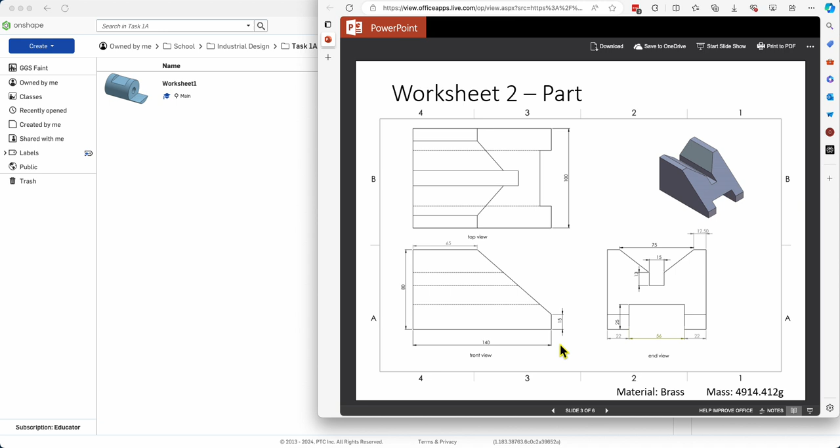So I'm going to come back over here. We're going to create our new document, and this is going to be my worksheet 2, still in that same folder. If we have a look at my dimensions, there'll be a couple of key things we'll need to think about when we develop this, but let's get our 140 rectangle by 80 is where we are at.

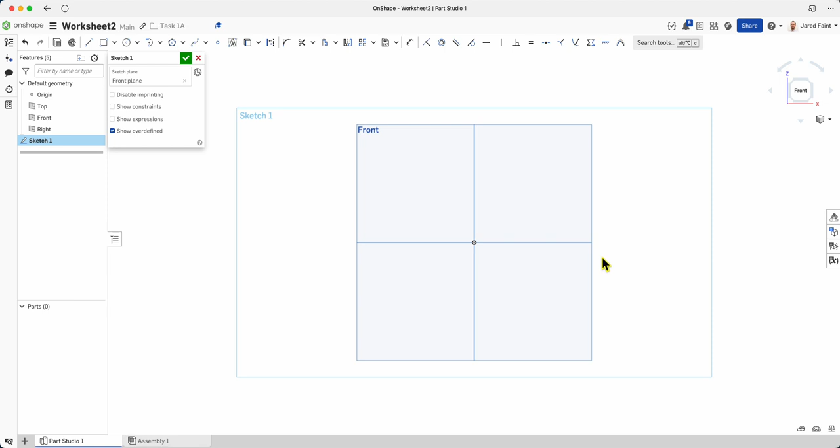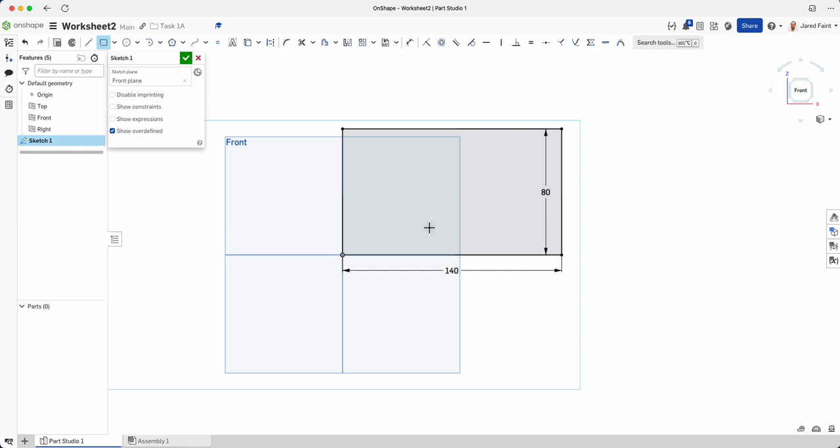This is on our front, so I'm going to create my sketch on the front view. I'm going to type N to take me normal to that flat view. I'm going to go from my origin, click that out - we have 140 by 80. 140, enter, 80, enter. If you forget to type those in, you can always come back up to dimension and lock those in. But now I've got that set up, you can notice that it's black.

Now if I come back down, I've got a line to go in 65 and 15 down. So I'm going to just add in a line for the moment, making sure it doesn't lock into the middle - see how that's trying to go midpoint, because it's not that. Now I can move that anywhere on the line, but this is where I'm going to add my dimensions.

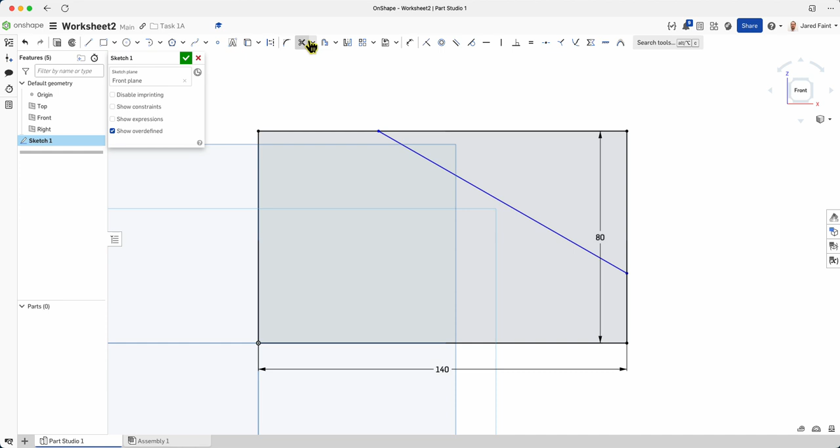So if we have a look back over, 65 and 15 is what I need. So I need my dimensions - those two are 65, and then that one from those two points was 15. Now if you want to, you could go and trim that out, but it doesn't matter because what we're going to do next is just extrude from there.

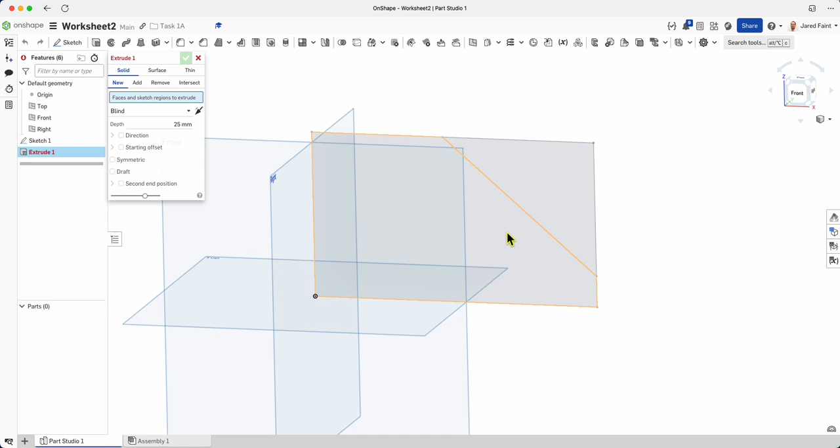So select the face that you want. How deep do we need it to go? If we have a look, it's 100 all the way back, so that's the dimension we need - 100 there, and tick, happy days. So there's the front face of ours there.

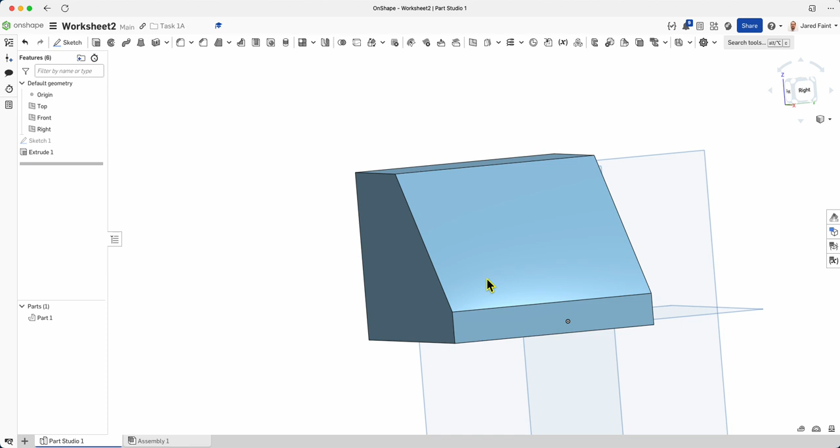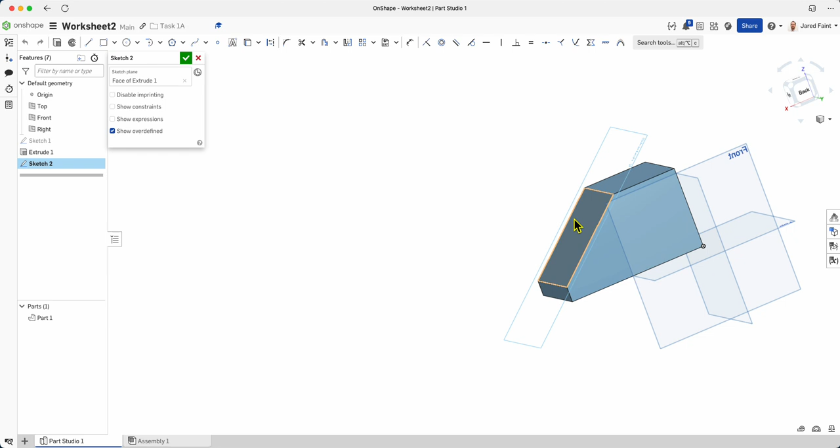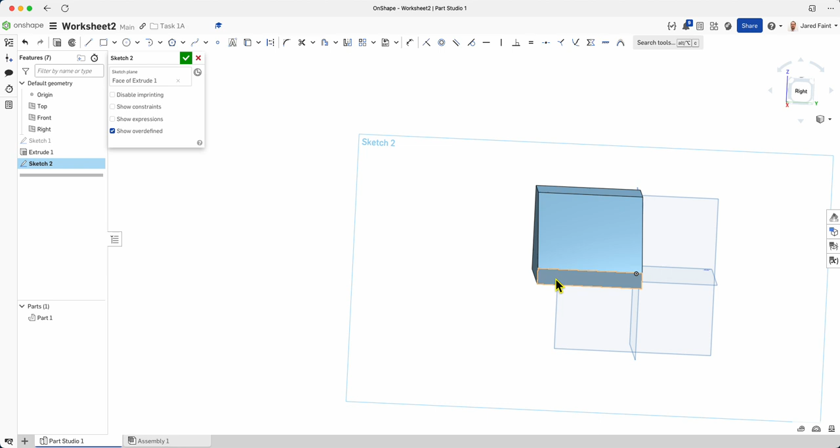Now we're going to come over to the right view and add those details. One of the errors we sometimes see here is you start trying to do a sketch on that plane - now if I do a sketch on that one, you notice it's on an angle. All my dimensions that have been taken from here are actually on the flat plane here, so I'm going to go through and remove that. Now I could do this either on this plane here, or on the right plane over here as well - so either one will work, but I've got it going on here so we can see that's where it's sitting. So I'm going to go back to normal view there, and I have got some dimensions to add in.

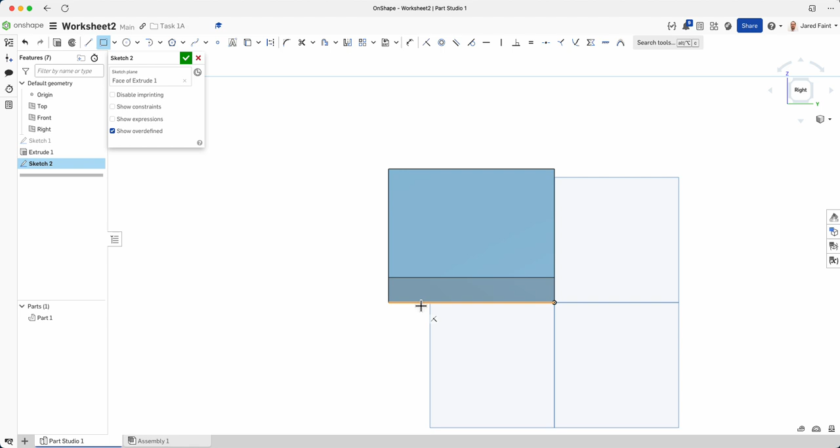So we can see we've got a little rectangle to add at the bottom, which is 25 by 56. Let's drop that on first - 25 by 56. There it is there, and I might lock that in straight away. So at the moment we can see he can go anywhere along there because I drew it on that line, so you can see the coincident relationship there.

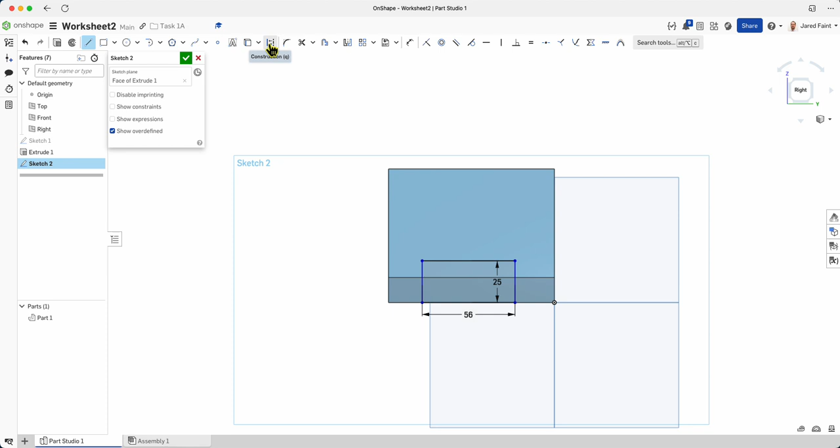But now we want this guy to actually be equal. So I'm actually going to use a center line, and I'm going to add construction to that. So if I hover over this guy, when we get to that midpoint, I'm going to drop that in there. At the moment, it doesn't matter how high I go. I'll lock that in, let's have a look.

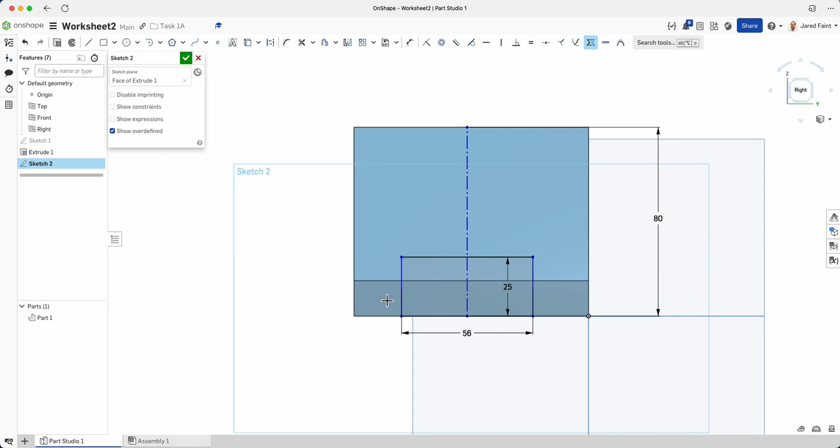How tall does it need to be? It's 80, so let's dimension that one - D for the shortcut. He wants to be 80, or I could have used a coincident to tie it into that top line there, but we've got that there, and we're going to use a symmetric here. So I'm going to choose that line, and then the symmetric line there, which should allow me - two, three, and he's not going to play.

Oh no, we've got the whole thing moving. So that's good, but I need that locked into the midpoint of that line. Now it can't move around, and we're looking good.

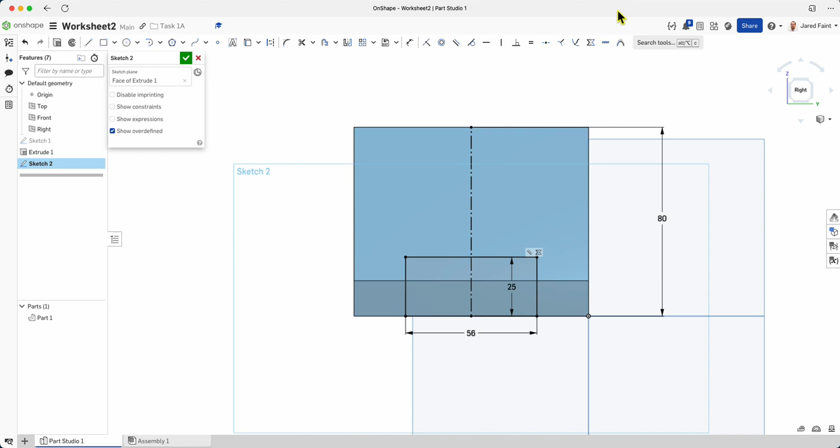The next thing we're going to look at is, I knew that was symmetric because I can see 22 on both sides. Now I've got this shape up here, again symmetric, so I'm going to just do half of it and work from there. So I've got my 75 for that one from the middle.

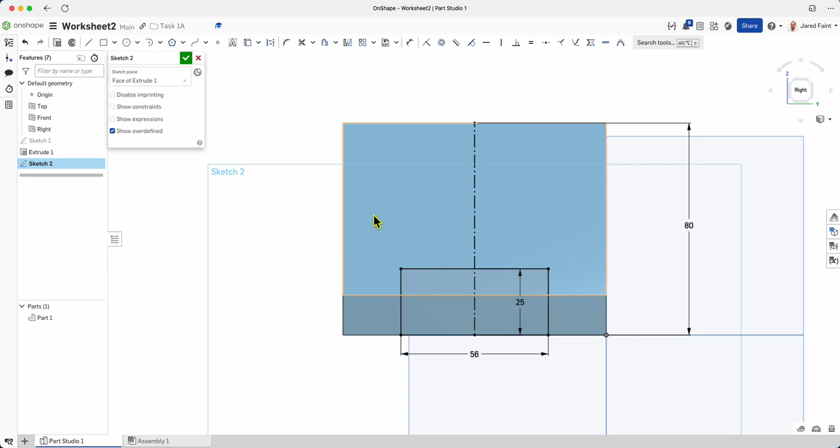This is quite cool now. I can go and draw my rough shape. I know it's going to be starting there, to there, to there, to there. If I have a look, that gives me that common shape.

I can see the sizes that I can easily do is that 13. So let's add that dimension in. 13. I know that line there is 12.5 inches from the edge. So let's tie that in.

12.5. Now I'm going to add a coincident, so that one is in line with that line there. Now that's locked in. I can still move this around because it's not fixed.

Let's see what other dimensions I've got there. If I have a look, I've got 75 from side to side. So what I can do here is go to my dimension again, and go 37.5, which is already there because I've got that locked in. So that's the right dimension there, and 15.

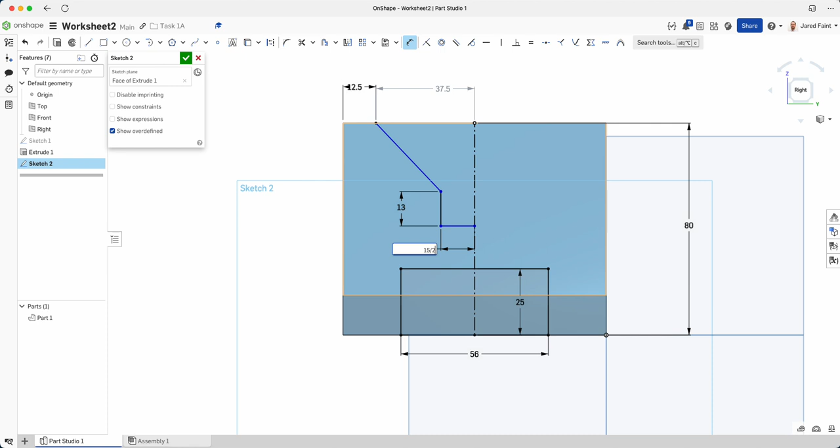So if I click that one, I can make it 15 divided by 2, and then that will solve that. Now if I have a look, that's looking pretty close. Is there any other information that I have that's going to be helpful there?

We're kind of missing some information to be able to actually decide how deep this is going to be. So this is sometimes what we need to do if you're not given all the information - we can see that space there is a little bit bigger than that, probably a little bit wider, so I'm going to make that a 16.

Now there's nothing else, and this is where we can actually do a little bit of testing when we get to the mass - this is my big question mark. So I'm going to add my dimension from that line to that line, and say about 16, and we'll see how we go from there.

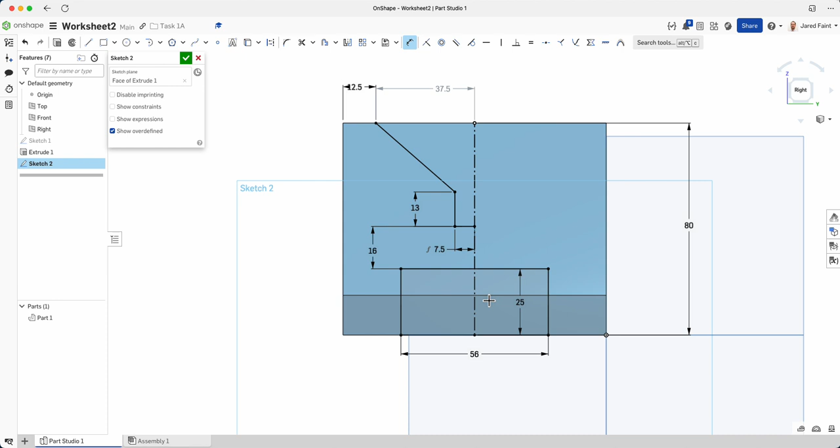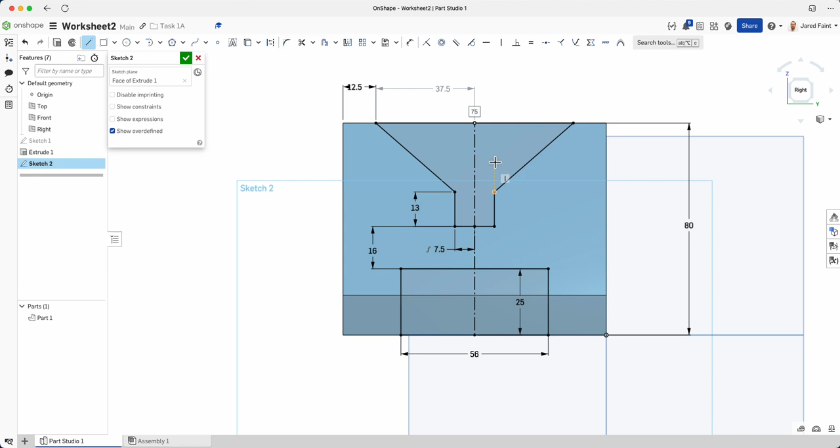Now that I've got that, I'm going to mirror. The first thing it asks me to do is select a mirror line, which is going to be that middle line. Then I can go through and select the lines I'd like it to mirror. The last thing I probably want to do is add my line up the middle to enclose that shape. Notice how it went grey - that is all fixed.

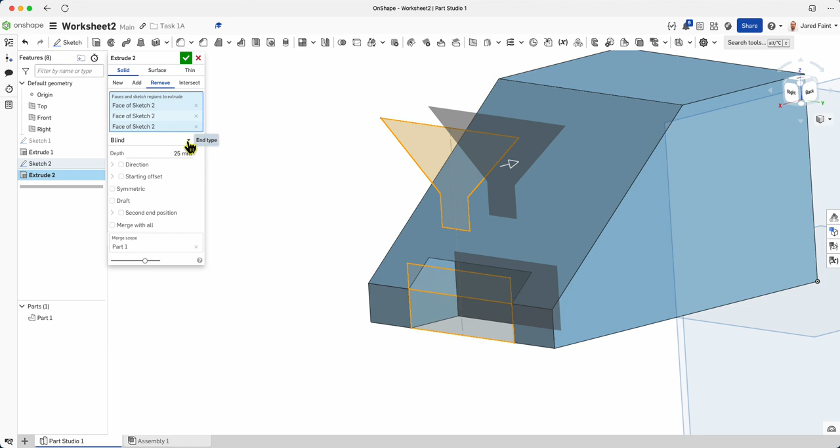So what I need to do now is finish that sketch, and extrude that shape as a remove. Instead of going blind, I'm going to go through all again. Now I've got that cut through, and my shape is looking pretty close to what's there.

Now let's go through and change the material. We said it was brass, and there it is. We're going to tick that, and let's have a look at what properties we have.

4.872, 4.91. If we take - so we're a little bit heavy. No, a little bit light. So let's try.

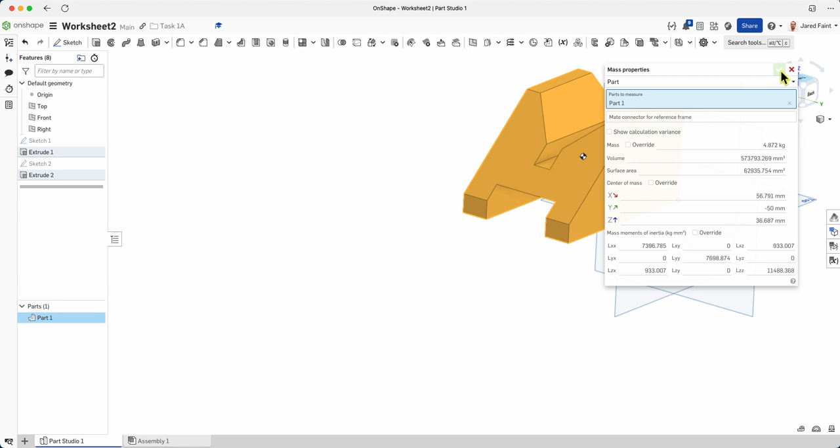Okay, so we're trying to get that mass about 4.914. So what we can do now is go back in and adjust that sketch.

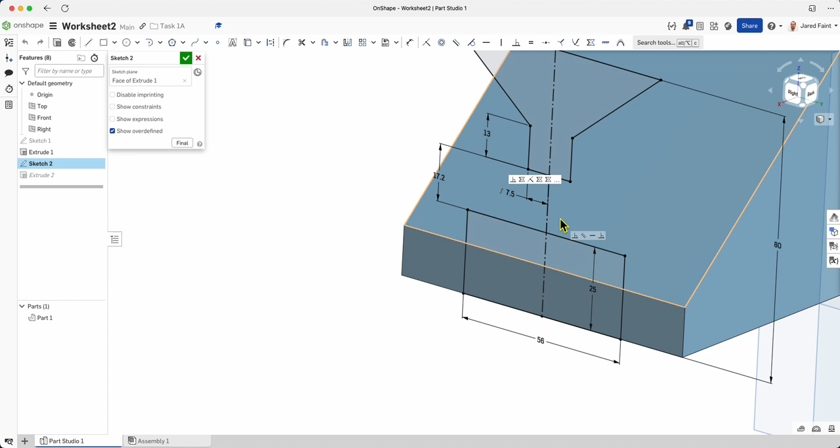I'm going to double click or right click on it to edit it again. You can see I've already had a little bit of a play - I paused the video and changed that out. We had a little bit more material because we needed a bit more weight, and it's out to 17.2.

So if I now check that, and display those mass properties again, we can see we're at 4.914, which is within 0.4 of the gram we're asking for. So that there is the dimensions we're looking for, which is fantastic.

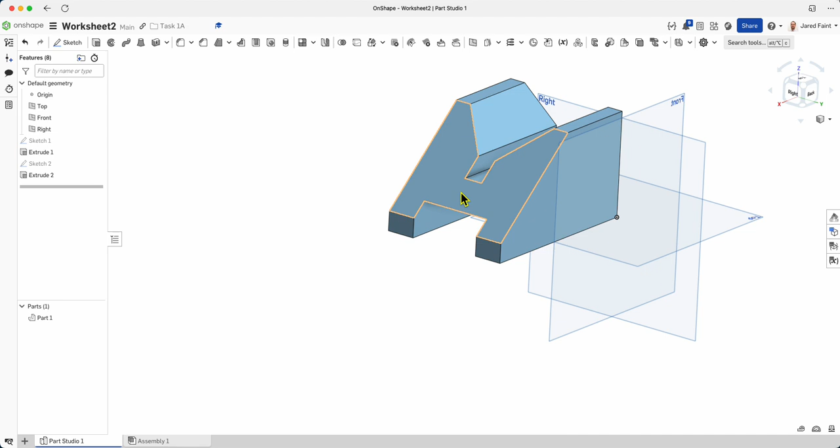So let's leave it there. We've got our material - you could always change the look of it, but I've just left it there as we go.